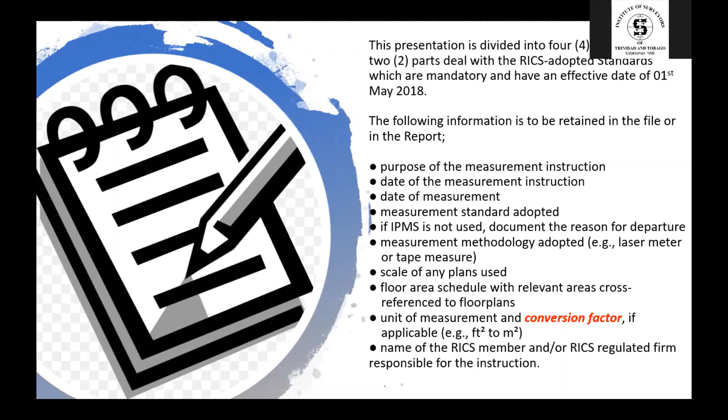Since surveying is the science of measurement, we should be as accurate and consistent as possible. So I've done this simple, straightforward calculator using Excel, which I'm proposing to send to all valuers so that we can agree on the conversion standards. It doesn't necessarily have to be in this format. I just want to have agreement with respect to conversion standards across the fraternity.

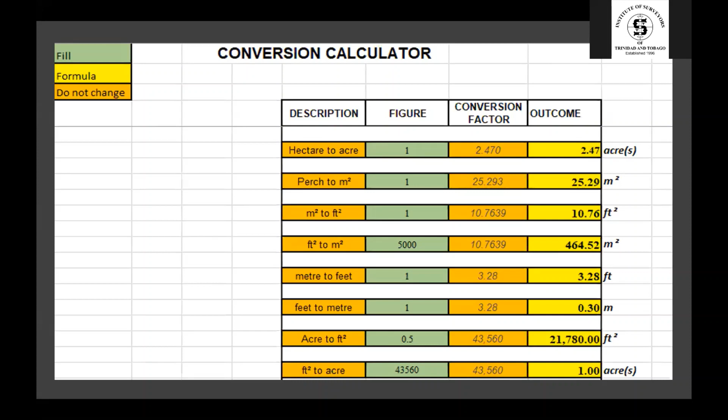So the standards embody office buildings and residential buildings. Office buildings are divided into IPMS 1, IPMS 2, IPMS 3 office. Residential buildings into IPMS 1, IPMS 2, IPMS 3A to 3C.

And to the right of the screen, we have its comparison with the Code of Measuring Practice 6th edition, which we are familiar with in previous years: gross external area, gross internal area, net internal area, effective floor area.

So the ones selected in red are the relevant standards pertinent to our measurement of residential and office classes of building. And these are also very similar to what we would have been accustomed to under Code of Measuring Practice, which would be the gross external area and net internal area.

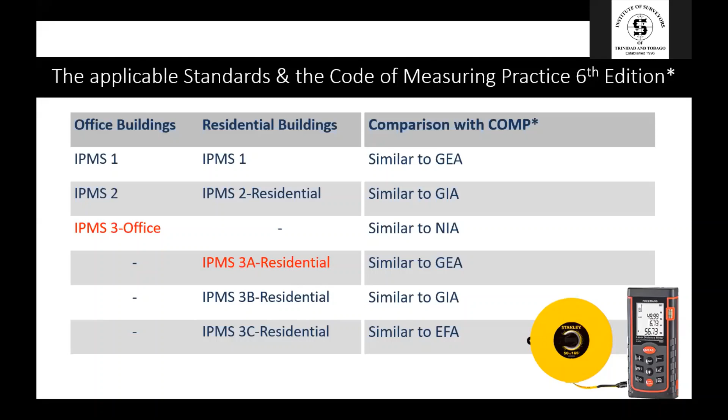Let's start off part 1, IPMS office buildings. So which basis of measurement would apply for valuation? Common practice before IPMS is to include the gross external area in reporting.

IPMS 1 is really the standard that you use to measure whole buildings. It is defined as the sum of the area of each floor level of a building measured to the outer perimeter of external construction features and reported on a floor-by-floor basis.

And the other highlighted standard would be IPMS 3 office. According to the practice statement, IPMS 3 office is defined as the floor area available on an exclusive basis to an occupier, measured and stated separately, but excluding standard facilities and shared circulation areas.

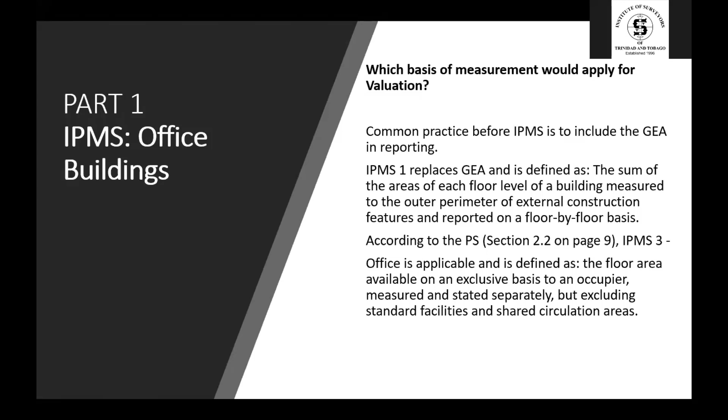So the left image shows the relevant area as determined by measurements using gross external area. And to the right would be IPMS 1, previously described, at the upper floor level. You could see from the diagrams that they are very similar in terms of how the area is calculated.

C being a void level on the upper floor, which is excluded. Everything else is included. It's just how you report it, because you have areas of the building labeled A and B, A being a covered gallery and B being a balcony, that you include, but you state separately.

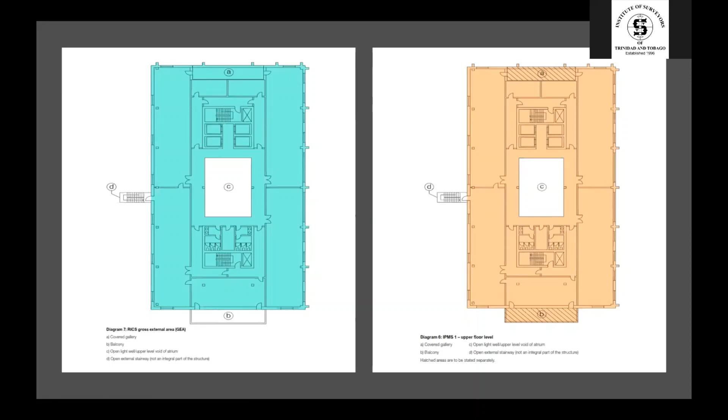Before we move on, I just want to introduce what might be a new concept to some, and that is the area within window reveals. So in measuring the building correctly, one must determine the internal dominant face, which is defined as the inside finished surface comprising more than 50% of the floor to ceiling height for each IDF wall section.

And in instances where you determine that it is to be measured, the glazing itself has to be greater than 50% of the floor to ceiling height, of that wall area, of that wall height. So you could see that this one is ignored because it's less than 50% — it's not 50% wide, it's 50% in height.

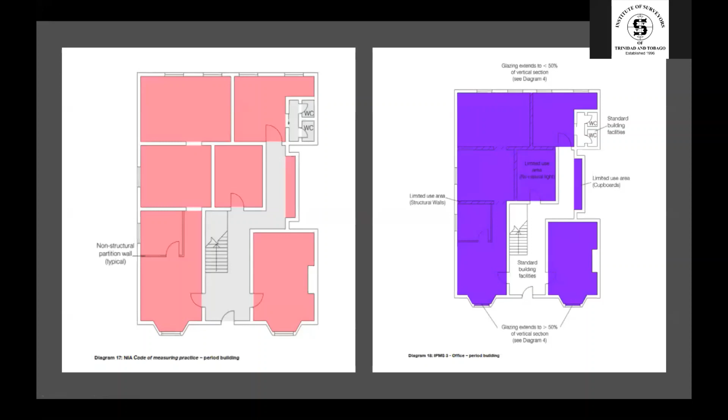So this would be measured to the internal dominant face, this area. And it also identifies another example of a limited use area. As you can see, the standard facilities are excluded, shown in white. One of the main differences now between NIA and IPMS 3 is that the columns are excluded in NIA, but in IPMS 3 the columns are included.

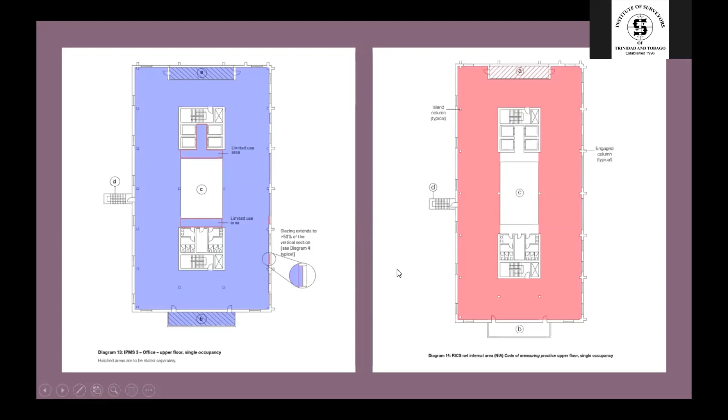And that could also effectively be a limited use area that could be reported separately - the area occupied by the columns, both island columns and engaged columns.

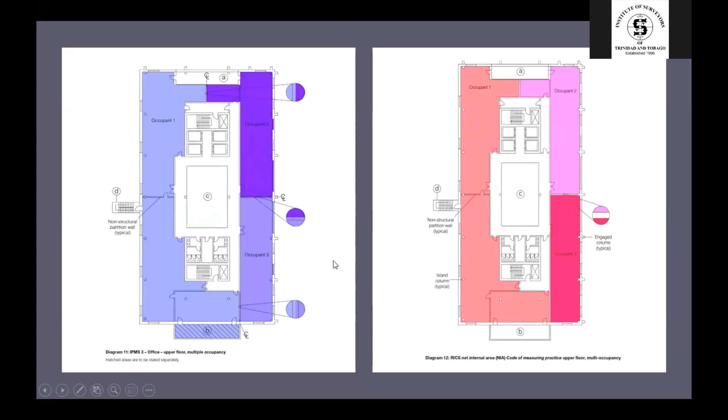It's the end of part 1. Part 2, IPMS on residential buildings. So which basis of measurement would apply for valuation? Common practice before IPMS was using the gross external area in measurement of residential buildings. According to the practice statement, IPMS 3A to 3C residential can each be used as a basis of measurement specifically for valuation. IPMS 3A, however, is chosen since it's very similar to how valuers are accustomed to measuring residential buildings, and it is defined as the floor area available on an exclusive basis to an occupier.

Let's get into some examples. So IPMS 3A is the area in exclusive occupation measured as follows: for a detached dwelling, example a freestanding single family house, you would measure to the outer face of the external wall. So you can see how that is very similar to gross external area.

For an attached dwelling, example a townhouse, you measure to the outer face of the external wall and to the center line of shared walls between occupants. That is not just going out on a limb here, but that is how I would have measured the buildings prior to IPMS, a townhouse specifically.

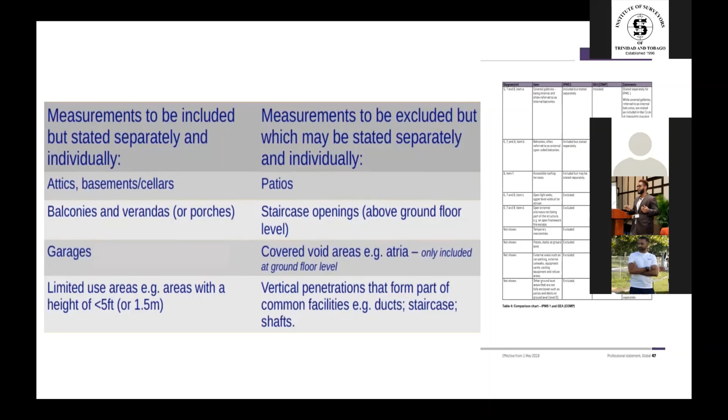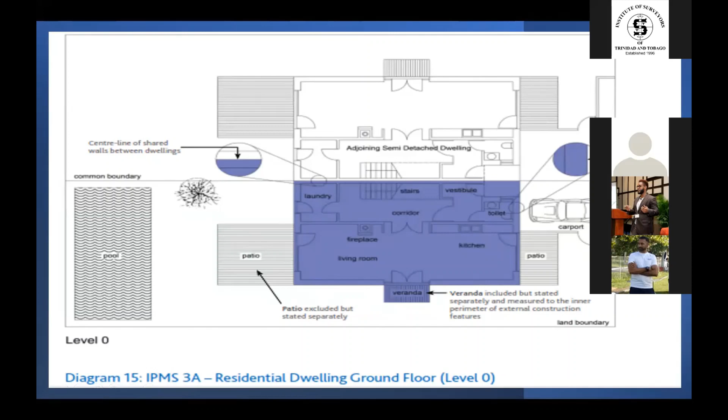Right, oh, Regina, part 3 already, okay.

Right, so like I said earlier, part 3 and 4 are really introductory type slides for the other 2 classes of building, that'd be industrial and retail.

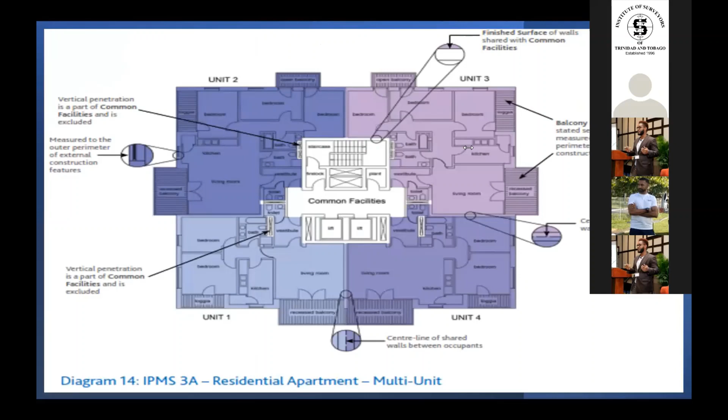Right, so a poll is now launched. You can read the questions: Are you aware of the concept of internal dominant face for commercial buildings? Do you practice using internal dominant face in measurement reporting? We do not know who answers yes or no, so feel free to be honest.

Because at the end of the day, all of us in Trinidad and Tobago are aiming to be using the same standards and to be reporting on one standard. So when someone reads our reports, it should be very similar in what we're reporting. So let's just get a view of what is actually going on. I'll leave it for 50 more seconds.

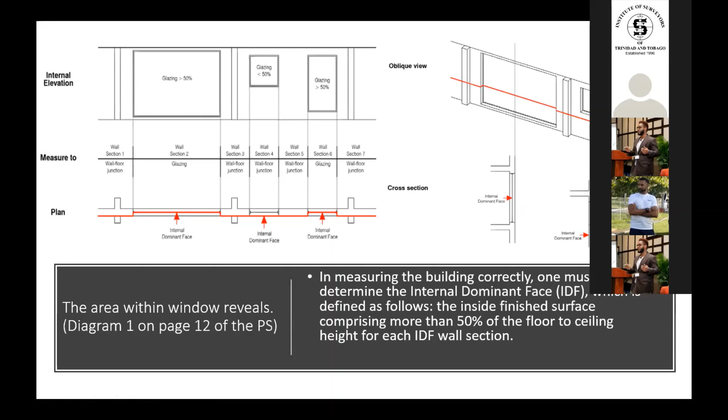Okay, I'm ending the poll. And you can see your results. I'm going to share it now, so we have something to talk about in a future meeting. You see that, David? Yeah. So some of us are not aware of internal dominant face. It may be a relatively new concept to some of us.

Okay, all right, you can continue into part 3. Yeah, keep this here, okay.

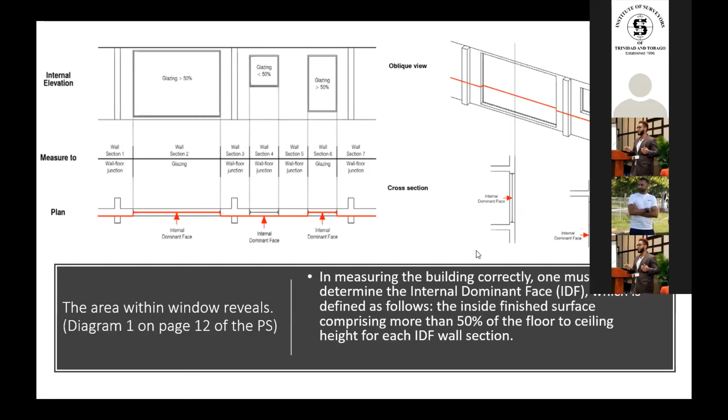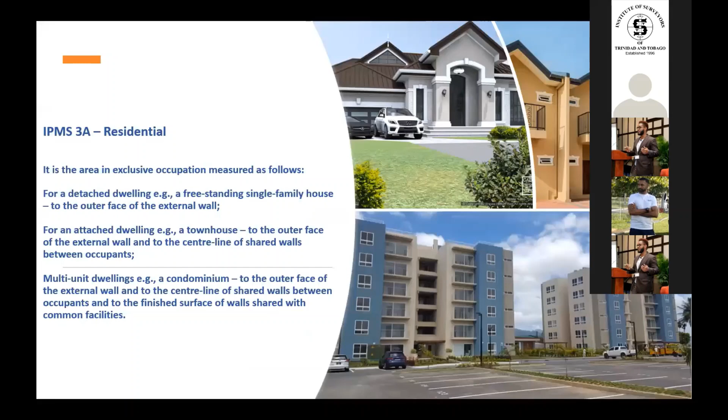I mean, it's a bit tedious, but it's part of the standards. Yeah, we had to do the work. We are measurement scientists after all. Also, we need to be mindful, not all the participants here are valuation surveyors. Yes, thanks for that, Ricardo.

So, an introduction to IPMS industrial buildings. This IPMS standard would have come out in January 2018. So far I've not seen any adoption as yet by the RICS. But the document exists, and I don't suspect that RICS will not adopt it sometime in the future.

So which basis of measurement would apply for valuation? Generally speaking, gross external area and gross internal area would be the two standards on the Code of Measuring Practice that I would have used in valuation of industrial buildings. The IPMS document actually identifies 4 different categories: IPMS 1, IPMS 2 industrial, IPMS 3A, and IPMS 3B. 3A and 3B are used for exclusive occupation.

Like I said before, IPMS 1 is measurement of whole buildings. So even if the building is subdivided into different units which are separate and independently occupied, if you're measuring the building as a whole, you refer to IPMS 1.

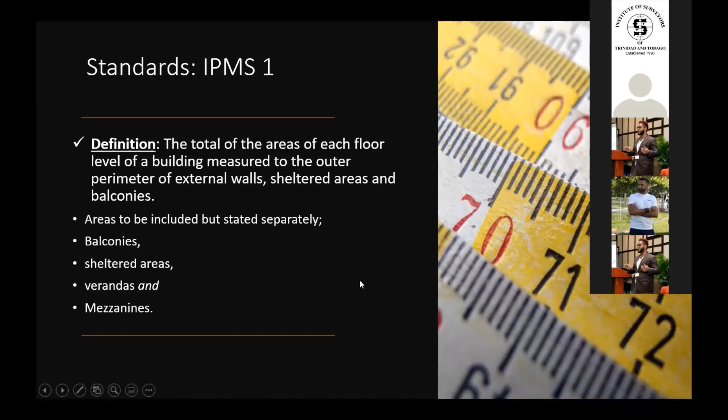Right, but that's the definition of IPMS 1. You can see the measurements illustrated here in the red lines, and you can see that the covered area is also included in IPMS 1. So you measure up to the drip line.

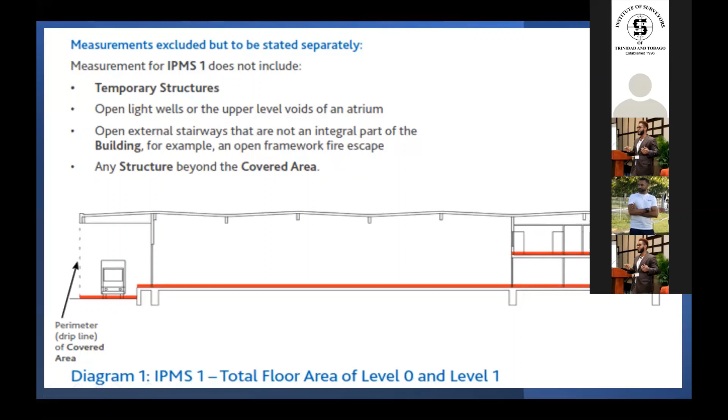Right, IPMS 1 ground floor. Sheltered areas included but stated separately. You're measuring to the outer perimeter of external construction features.

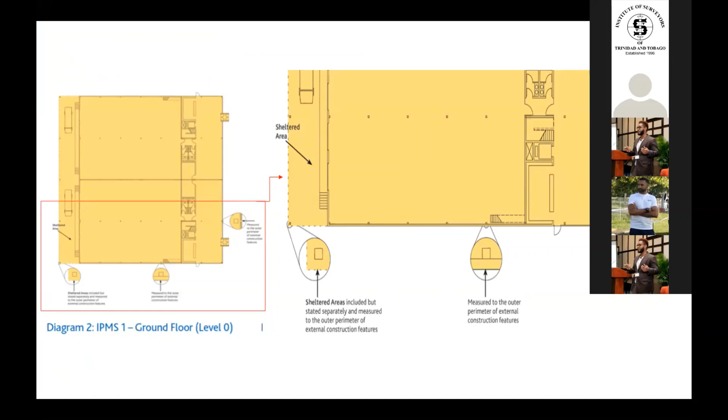Right, IPMS 2: the total of the areas of each floor level of a building measured to the internal dominant face of all external walls and balconies on each level. So this is similar to gross internal area. And as you would imagine, the office space within industrial buildings are also to be measured in accordance with IPMS 2.

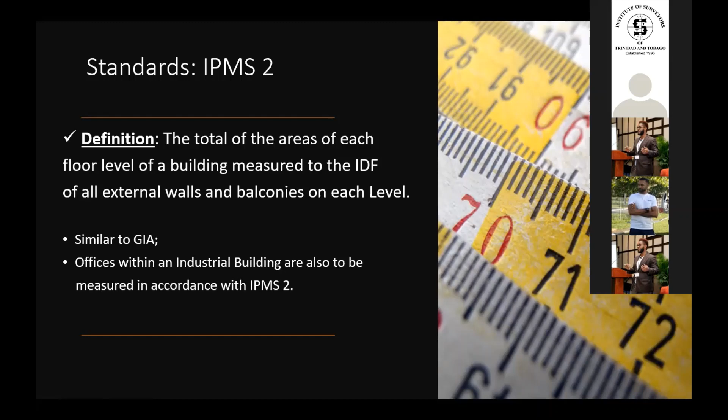So you can see the external walls are excluded, as well as the covered area.

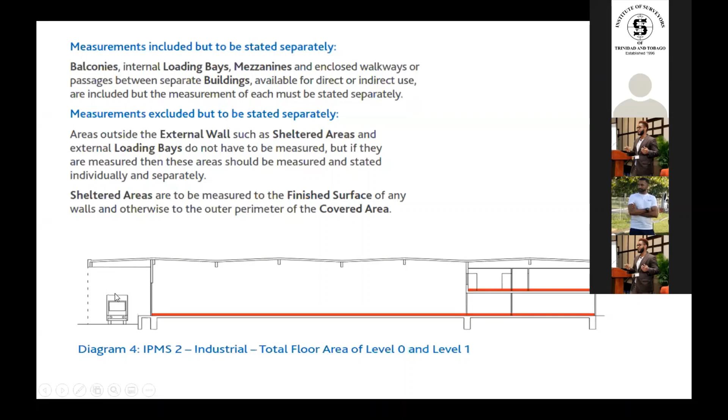Right, this is just illustrating that further. And again, the IDF comes to light here, but in this case, it's a roller shutter door, which is consistent with some industrial buildings. So you're measuring to the shutter line, as they describe it here.

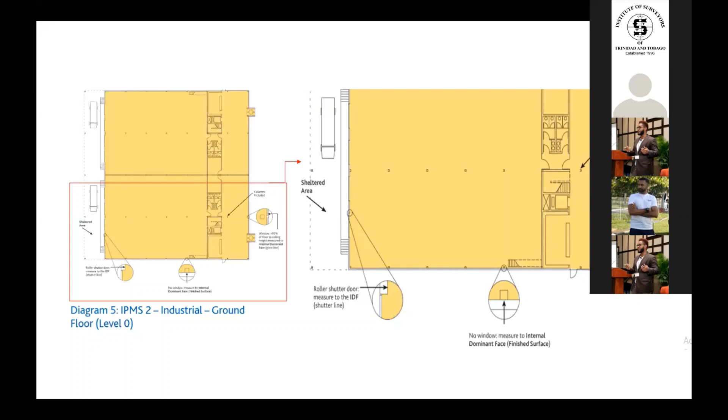And this is the upper floor, IPMS 2. So you could see one of the main differences is that they're asking that we include the area occupied by the staircase. I'm not sure, but under the Code of Measuring Practice, we would have ignored that space. That actually forms part of the upper floor or mezzanine, as the case might be.

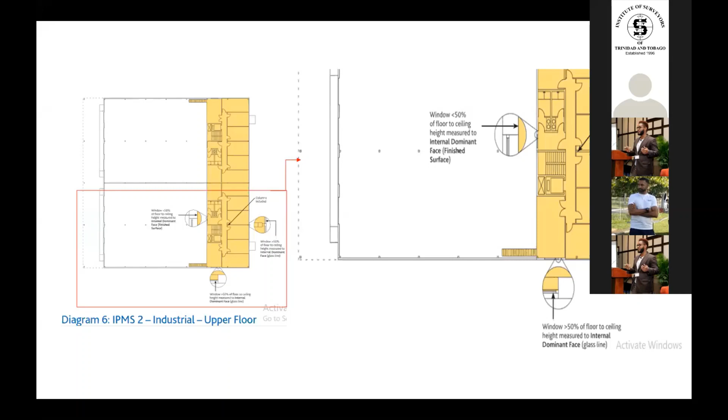Right, the standards for exclusive occupation, IPMS 3A and IPMS 3B. 3A: the floor area available on an exclusive basis to an occupier, measured from the outside face of the external walls and any balconies, and also including sheltered areas. IPMS 3B, very similar: the floor area available on an exclusive basis to an occupier, measured to the internal dominant face of external walls and balconies, and otherwise to the covered area.

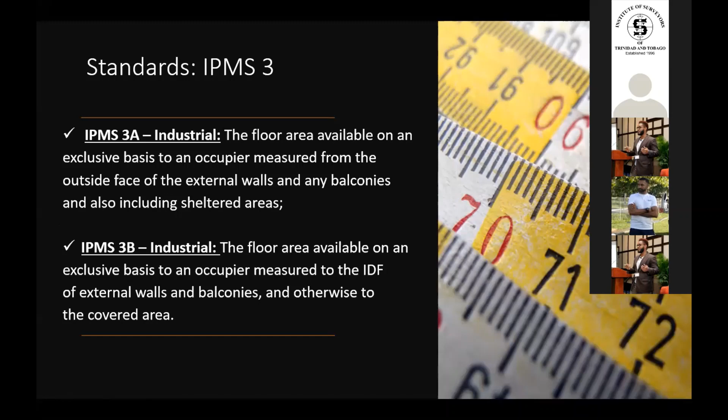It's represented here on the ground floor, IPMS 3A. So measure to the center line between the shared units. The sheltered areas are included but stated separately. Measuring to the outer perimeter of external construction features.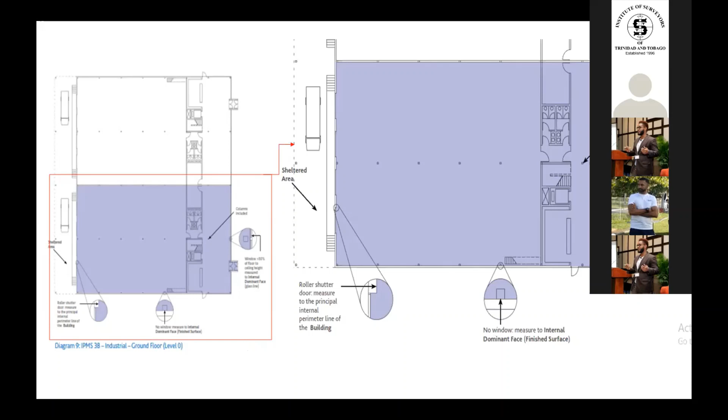I don't think this is a new concept, probably as it's better defined here. So the clear height is the height measured from the floor to the lowest point of the structural element above, ignoring any brackets, struts, or fixtures and fittings. This could be important to an occupier or prospective tenant in knowing the height, to know for sure the stacking capabilities or the ability of the building to accommodate certain pallet heights. So I think it's an important measurement to take. Also, it could dictate whether or not the building could accommodate a gantry crane or something like that. So that's clear height.

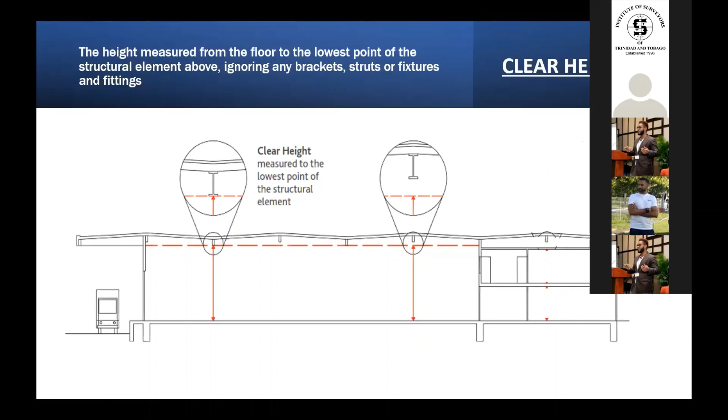Then we have internal height, which is more or less within the office space, you could say. The height measured from the floor to the lowest point of the ceiling, ignoring the existence of any brackets, struts, or fixtures and fittings.

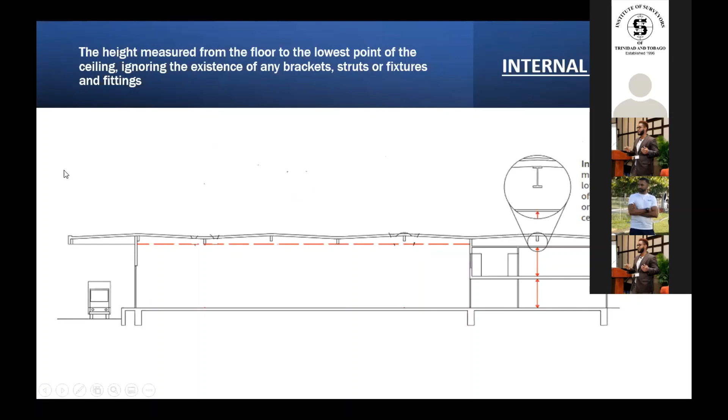That's the end of part 3.

I could go on, Ricardo, anything here? The last part to do is part 4. Yeah, you could go ahead.

Right, an introduction to IPMS, and this would cover retail buildings. Fun stuff.

Right, these are the standards broken down: IPMS 1, IPMS 2 retail, IPMS 3A retail to 3C.

So this is IPMS 1, as you can see, is a measurement of the whole building, inclusive of everything, measured to the outer perimeter of external walls. This might be a fairly new concept as well, the presumed boundary. So you're not actually measuring to where the wall is, but to a hypothetical boundary line.

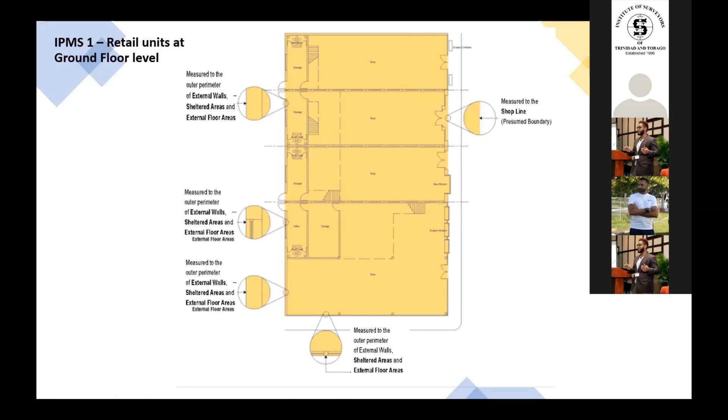In the case of this unit, that's the ground floor. Right, first floor, or the mezzanine level for retail units. Once again, we are including the area occupied by the staircase at this level. Measured to the outer perimeter of external walls, the void areas are excluded.

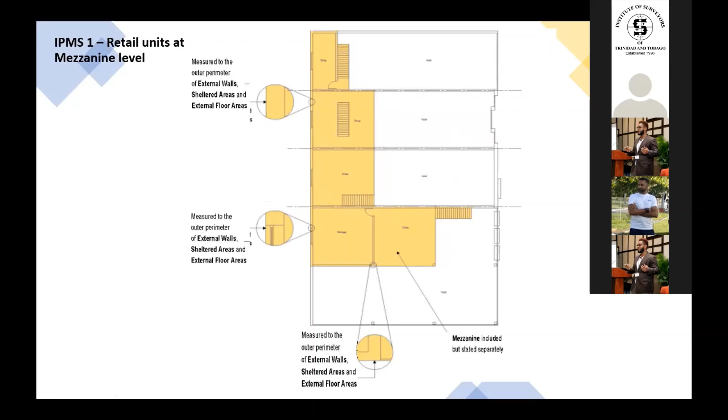Fairly straightforward for a retail shopping mall, ground floor level, measured to the outer perimeter of external walls. As you can see, they included the loading dock above here as well, which may or may not be covered.

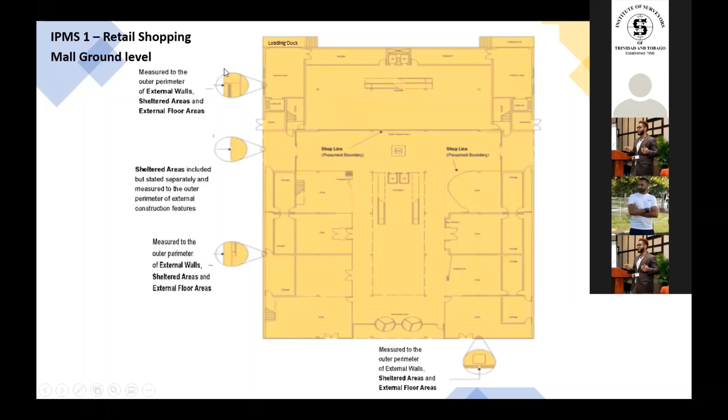At the first floor level, similarly, not including the void areas, you're including the space occupied by the staircase as well as the escalators and the lifts that intrude into the void area. You're actually measuring that and including it in IPMS 1.

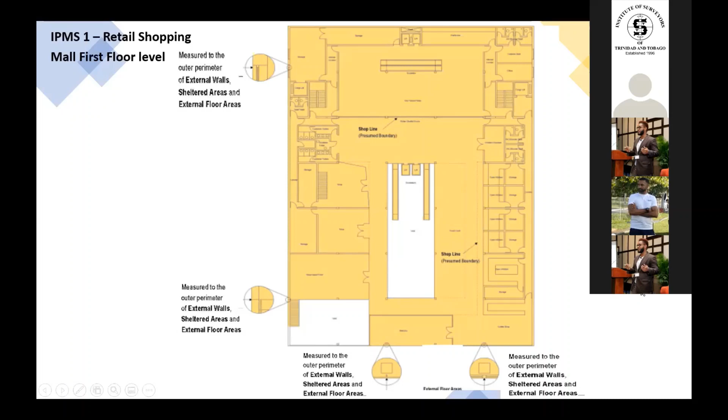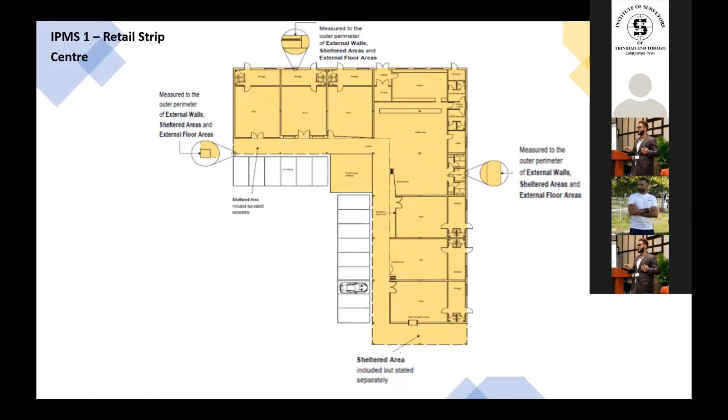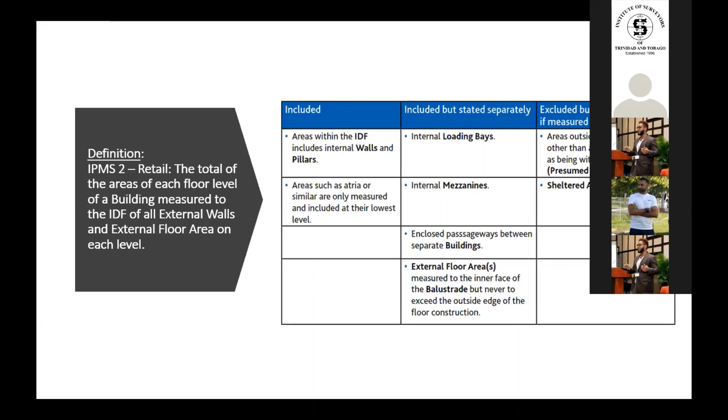IPMS 2 retail: the total of the areas of each floor level of a building, measured to the internal dominant face of all external walls, and external floor area on each level. We have some more details here. I won't get into it too much because I don't think this particular standard is relevant in terms of how we practice the valuation of retail buildings here. I could be wrong, but that could be up for debate.

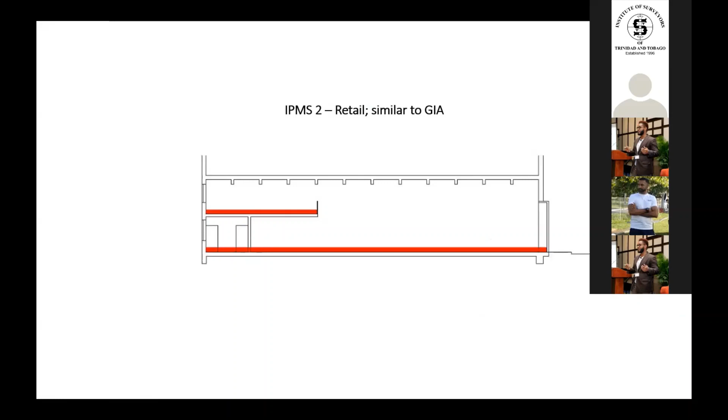So similar to gross internal area. IPMS 3 retail applies to exclusive occupancy. IPMS 3A: the area in exclusive occupation, including the floor area occupied by external walls, internal walls and pillars, including any external floor area, sheltered area, and ancillary areas. IPMS 3B: the area in exclusive occupation, including the floor area occupied by internal walls and pillars, and may include external floor areas and ancillary areas.

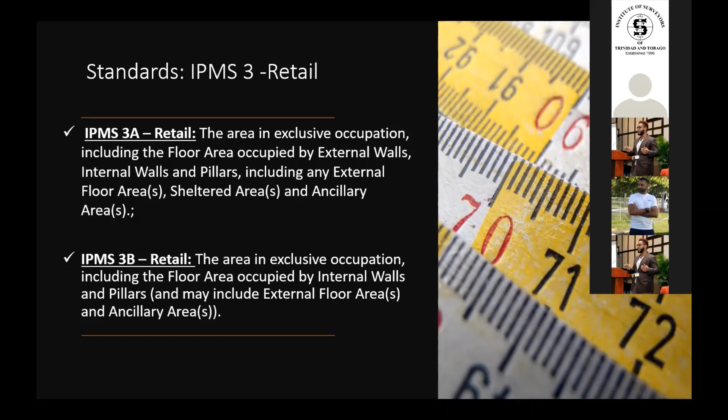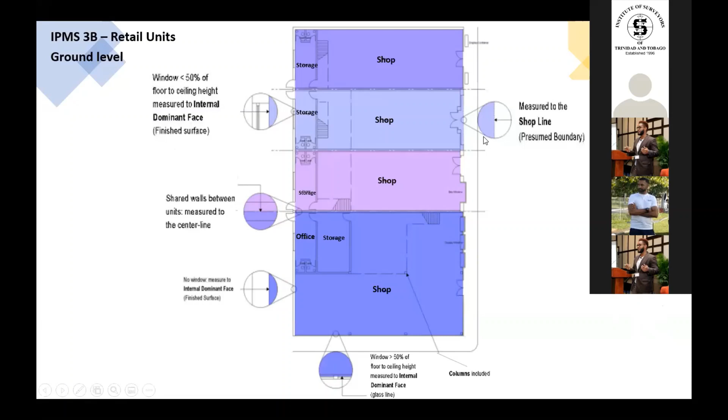Let's see a drawing representation of that. So windows less than 50% of floor to ceiling height measured to internal dominant face, that is the finished surface. We measure the center line of shared walls between units. And again, this concept of presumed boundaries arises. Right, columns included.

At the upper level, you could see the staircases are not included in the area. Voids are excluded, and columns are included. Again, the shared walls between units are measured to the center line.

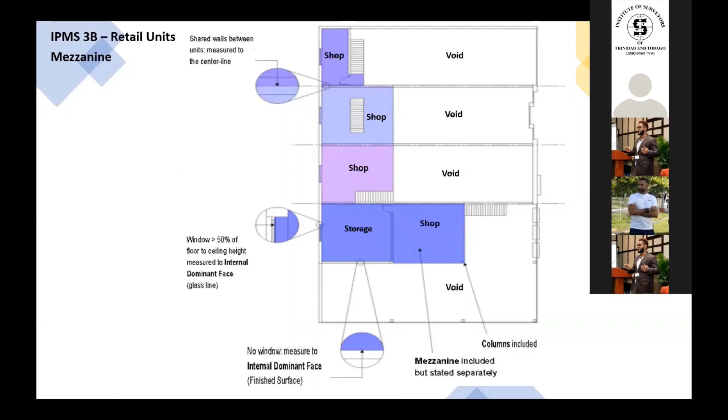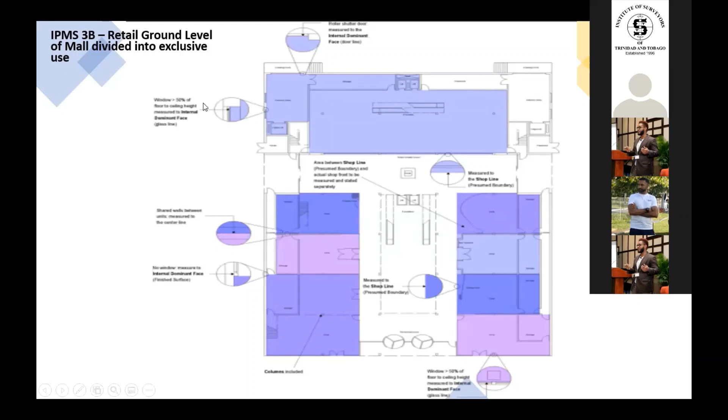IPMS 3B, retail ground level of mall, divided into exclusive use. It's a bit easier here, but in the following slide, this is the top part. Let's see it much clearer here. The roller shutter door is measured to the internal dominant face, so you're measuring along its length.

Windows greater than 50% of floor to ceiling height are measured to the internal dominant face. This is an area in exclusive use. You can see they have exclusive use of this cargo lift, but not the other. These areas in white are more or less common or standard facilities.

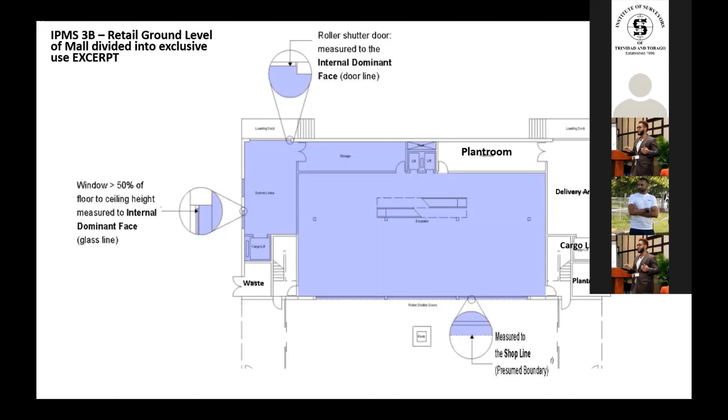What we're looking at here is actually the bottom part of this. Some of those mall units, the corner ones, actually have a curved wall to the front of their unit. So you're actually squaring it off, measuring that, and then measuring the area using the original, existing boundary wall, you could say.

You work on that area and state it separately. That is something I wanted to highlight. So you have shared walls between units measured to the center line.

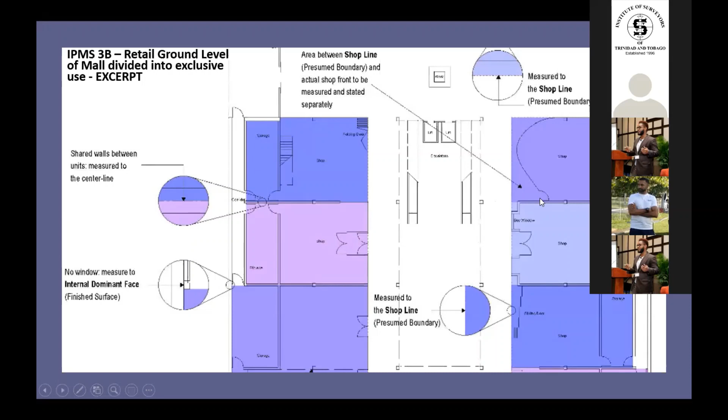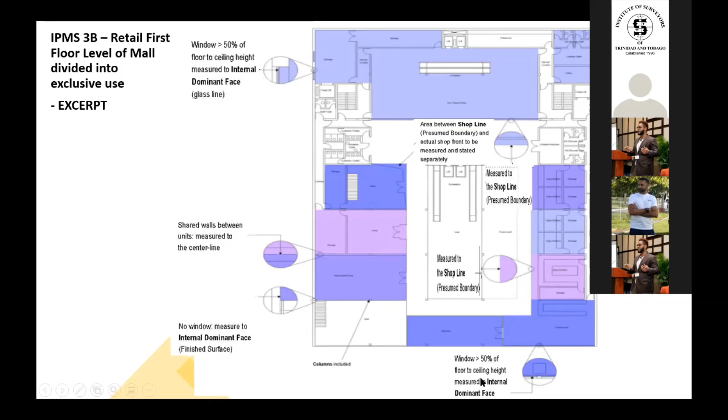Measure to the shop line or presumed boundary, and once again, the internal dominant face. Windows greater than 50% of floor to ceiling height are measured to the internal dominant face.

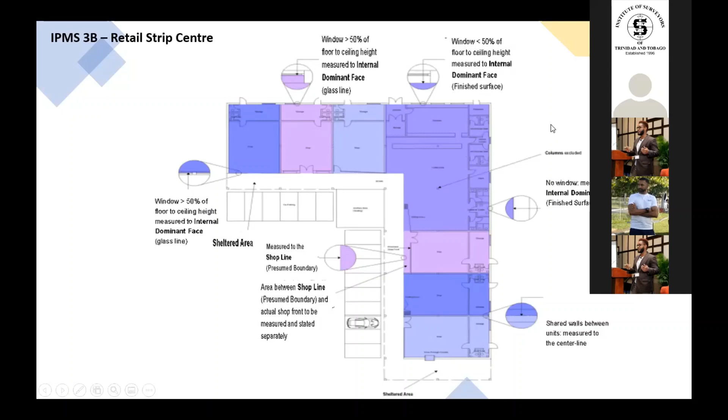All restrooms, washrooms, all of that is included.

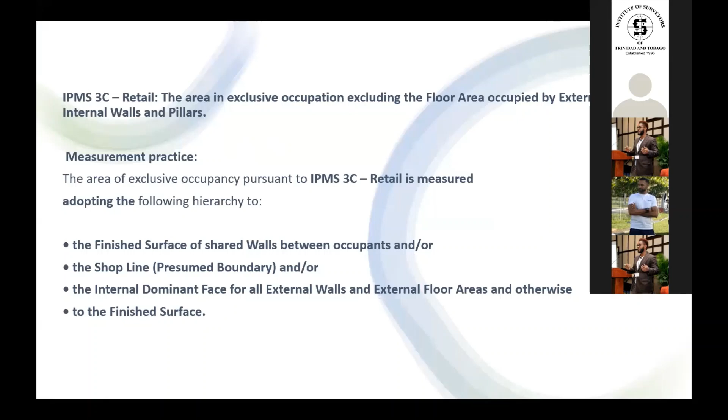That'll bring me to the end of my short journey here. Thank you very much.

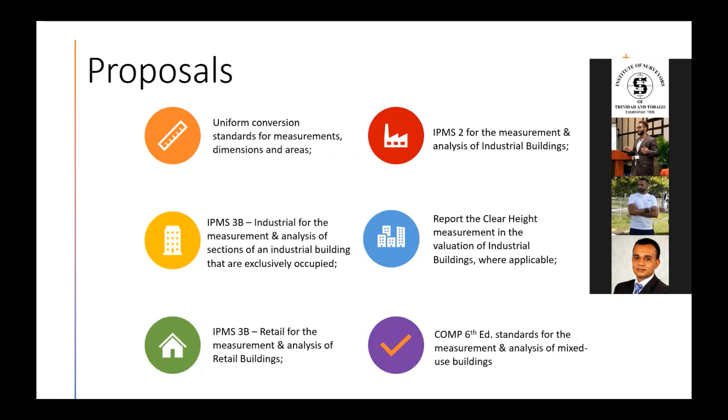Well, the conversation has gone into understanding the nuanced differences between landlord and tenant relationship and the measurement standard. And so that is where I think your answer will come, Sunil. I think you also answered your own question, because it's understanding where there's a difference there. In David's presentation, he made reference to certain aspects of the standard that might not necessarily be relevant to us. And that is key, because we understand the market we operate in, and we understand typical landlord-tenant relationships, typical landlord-tenant leases. The development of that across time and in our market will sort of dictate or even supersede what IPMS may say or indicate. So, for example, if you have a building that is rented to a singular tenant...

Then what does the lease indicate? Does the lease indicate that the landlord is responsible for maintenance and management of all of the service and HVAC facilities in the building? For example, does the landlord hold the keys to the AC rooms, electrical rooms, and telephone rooms, and maintain and manage all that? And how do you treat that in terms of reconciling it with IPMS? So I think that's where your answer may be, Sunil, understanding how landlord and tenant relationships are kind of dictating what even the area of the building is - what area is being leased to the tenant, what the tenant is responsible for, and how we correlate that with what the IPMS measurement is.

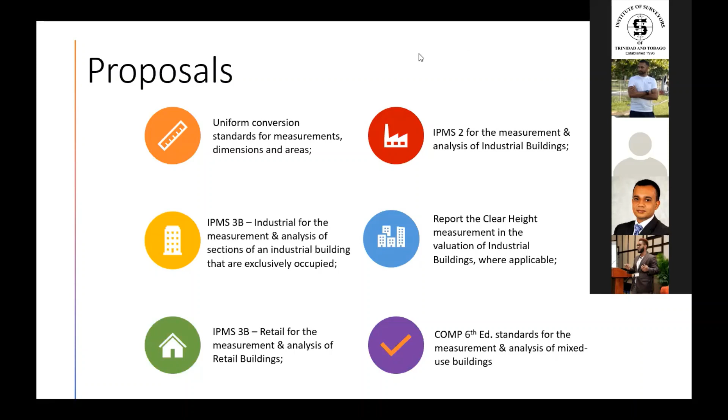I'm not sure if Matthew is getting some trouble with his mic. You see any question, David, in chat? Let's see, where's chat? I think I have to stop sharing this. Yeah, stop sharing and check. Oh right, okay.

Different levels. I really don't understand what you mean by different levels. The building levels?

I'm thinking this might have actually tied into what I was speaking about before, using the different standards, the different IPMS 1, 2, 3, etc. I think the property measurement standard book, second edition, makes it clear on what level or standard, I use it interchangeably, to use for what particular purpose. So I think we should refer to that, the prescribed purpose for each of the standards.

Talking about valuation, those standards that I identified earlier would be the relevant ones. I just want to say, colleagues, we should practice taking a lot of measurements. That way, we could convert the measurements to meet any requirement under any of the various standards. So we could convert IPMS 3A for office back to NIA if we need to, or even within IPMS 1, 2, 3A, whatever it is, you take measurements. That would be my advice.